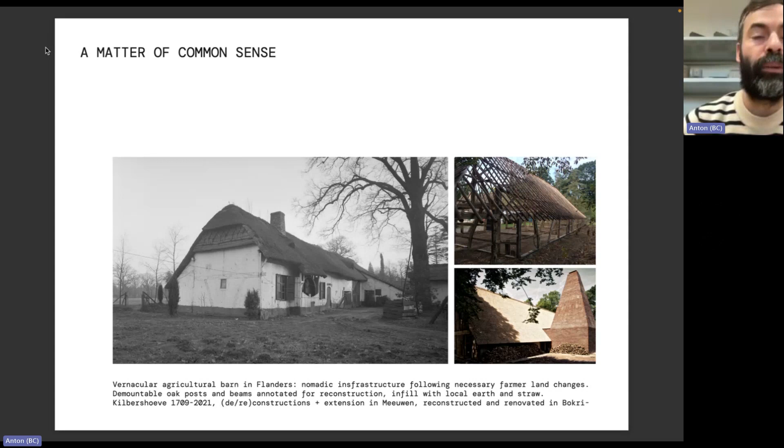And we saw this in Bokrijk, where the oak beams were actually numbered, so that people who would dismantle them later could really reuse them on the spot, reinstall them, and make a different structure or a similar structure. And for the renovation of this building, which was one of the first projects of BC Architects, we installed a rammed bar that you can see on the right side down. But in this way, you see that although the farming is obviously not the same anymore, this kind of building approach has a lot of merits and should be followed upon also in larger structures.

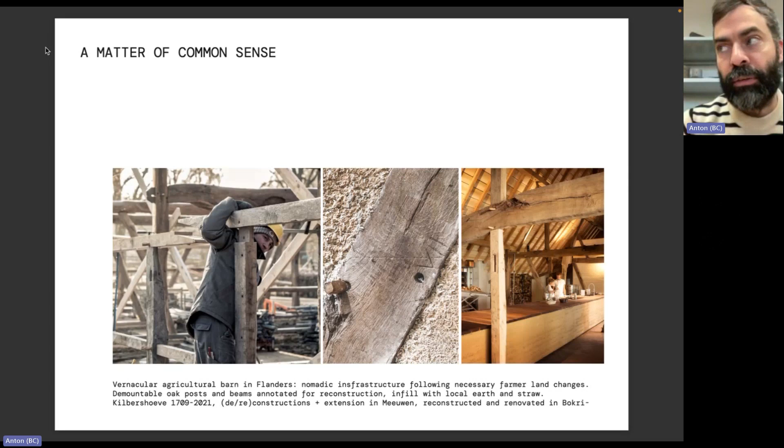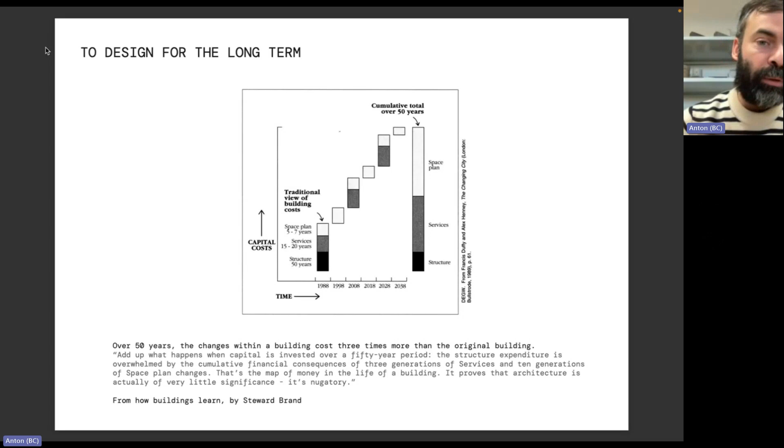As you know, architects try to design for the long term, but there are lots of costs that are underestimated or underappreciated. For example, the structure is considered very, very costly, but actually a lot of internal services and other expenditures in a building are also quite costly. So it also means that architecture is not that important as a lot of people think. It's also a matter of material use. It's also a matter of pre-design and availability of materials, because we know that we are running out of materials quite fast.

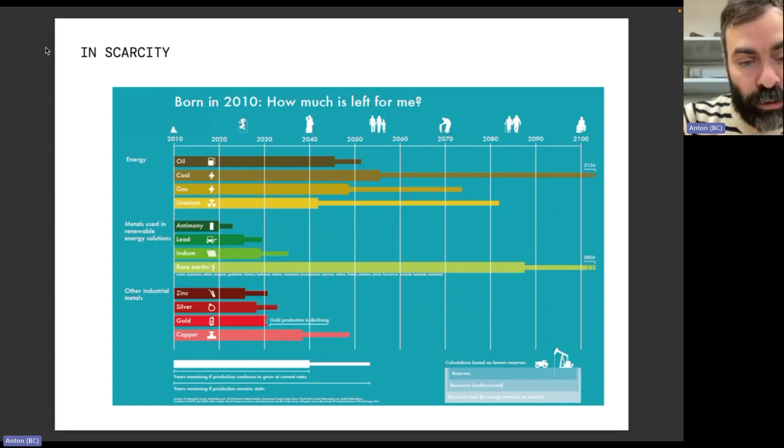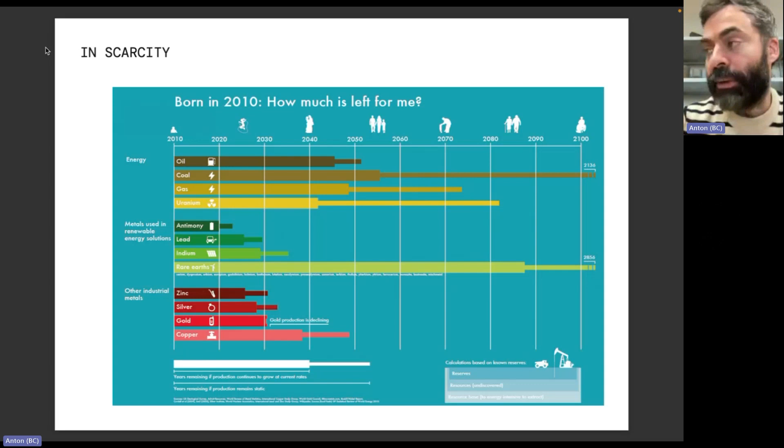I think in 2020, researchers found out that the amount of waste that we created on this planet actually surpassed the amount of biomass. So all the trees, all the plants, all the creatures in the world were actually surpassed by the amount of waste in the world. And one of the top quantities of waste is concrete, obviously, but also baked bricks and asphalt.

So we know that even if we work with a circular economy, it still has limits. And if we would all build very, very big houses on a circular base, we would still be ruining the planet. It means that even if we think from a circular perspective, we also should keep in mind the kind of sufficiency needs, and aside from sufficiency, also the complete reuse of the materials, because recyclability is not the only thing that matters.

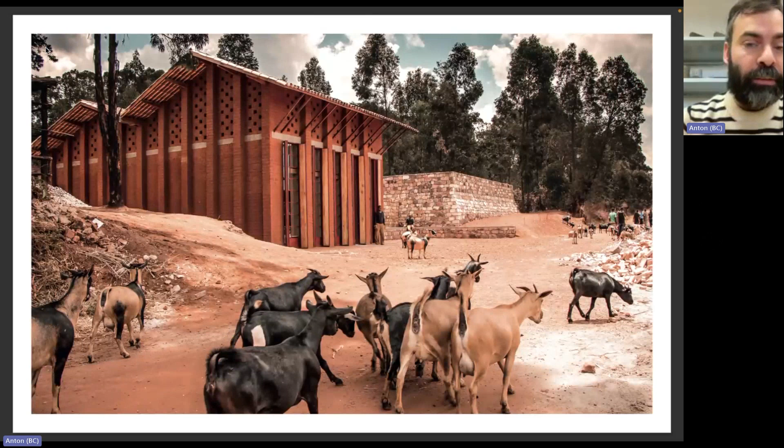This is a bit why we try to prototype a lot in our practice. We see that prototyping can help titillate the minds, can help stimulate the imagination. And our imagination was really triggered in a very, very revealing and a very enlightening way almost 10 years ago when we did this first project in Burundi.

And it's actually in a very small town called Muyinga. And there we discovered that it is perfectly possible to build with excavated earth. As architects that had just finished architecture school, we came there and we thought it's going to be impossible to build here because there are no classic building material shops. There are no possibilities to produce them ourselves because there are lots of hindrances and obstacles.

And it's actually a contractor who explained to us that it's perfectly possible to build with excavated earth and with lots of other local materials, bio-based, for example, that could be valorized on the spot. For us, it was a big revelation because, as architects, we were trained to work with steel, with concrete, with baked bricks.

But as we saw and learned on the spot, it's perfectly possible to use this kind of excavated earth. As you may know, in Africa, there's lots of laterite. It's a very reddish earth that has very good characteristics for earth building. It's quite strong. It doesn't have to be mixed that much with other earth streams. But it's actually there that we learned how to really work with and valorize local earth.

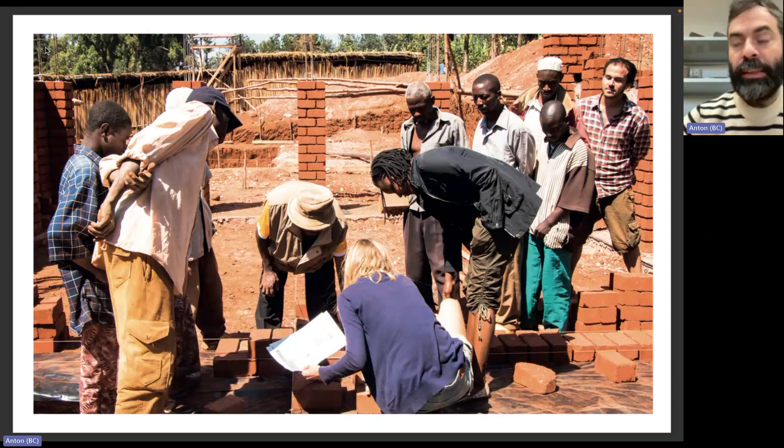And we actually saw that it's a very circular solution. But for people who build there, it's also the most standard and the most accessible solution. For them, it is the solution and it's a sufficiency aspect. Here in Belgium, we still have to learn a lot in that sense of using what is available in a short loop instead of seeing the whole world as a supermarket where we can buy materials from all over the world.

And this is also what we did in Arles as a team, BC Architects, BC Materials, the London bureau Assemble and Atelier Luma. Arles is a not so big town in the south of France, where the foundation Atelier Luma has bought a number of derelict buildings that used to be old train stations.

And our mission there was to really start seeing what is available around in a perimeter of about 100 kilometers, to see what we can use, what we can source in a very short loop to make materials, to renovate a number of these train stations and see what could be done with the materials that are available in the land, in the quarries, in the earth streams that are available.

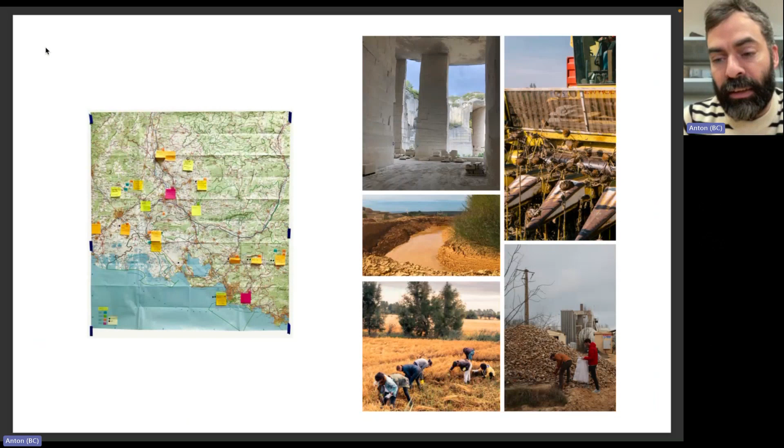Here you can see some pictures of a quarry at Sarrazin, also some excavated earth from different sites. And for example, rice husk, that is one of the most common plants being cultivated in Arles, and that can be used for insulation, or straw, for example.

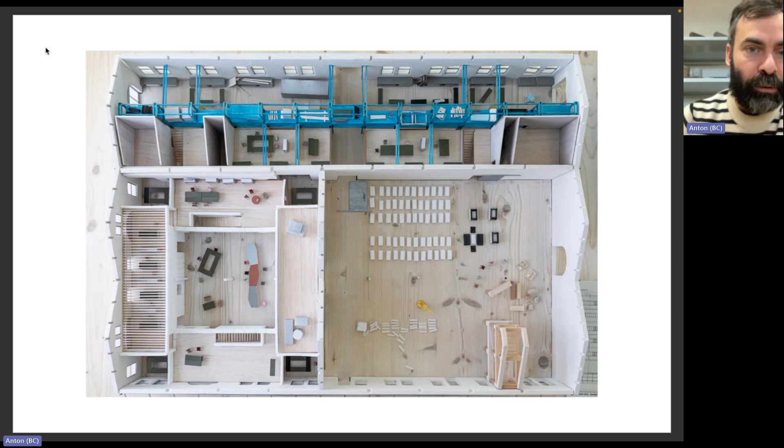It is a quite interesting site because it has both productive aspects and a kind of showroom aspect, and at the same time, on the first floor, a lab. And for this site, which is completely bio-local and circularly made, we made, for example, rice straw insulation panels that are acoustically much better.

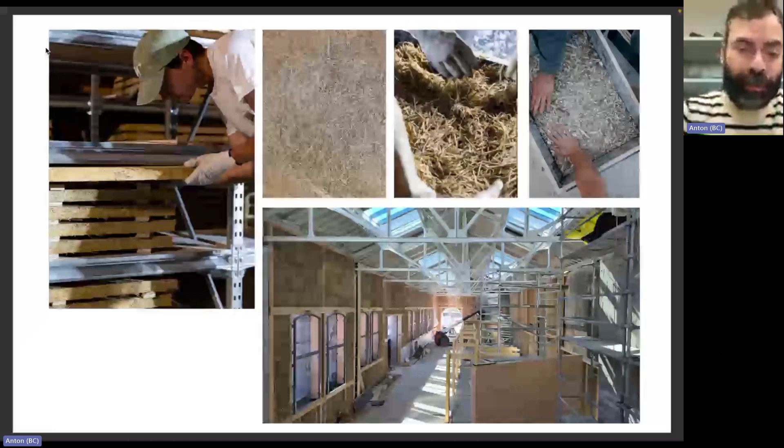They are situated at the ateliers. We saw that it was possible to kind of bind them and really compress them together, and they are situated at the left side. We also made typically rammed earth. You can see the picture on the right. A rammed earth that is based on typical elements of quarry waste, earth excavation, and gravel from the site.

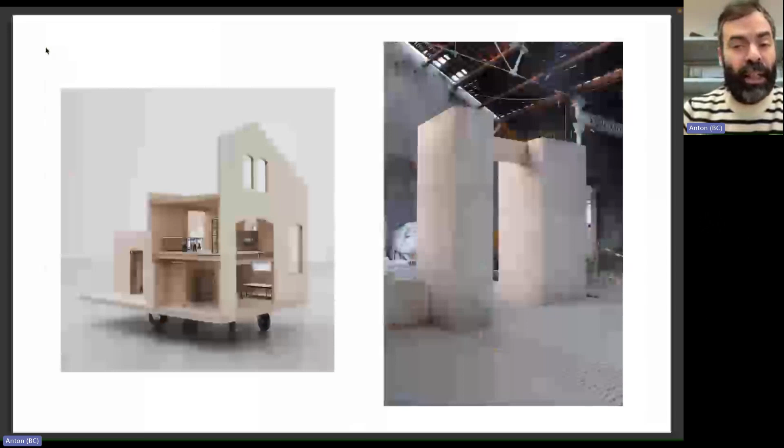You can see here the different elements that you can bring together that are practically CO2 neutral because they don't have to be baked, they don't have to be burnt to be used. And when you blend these elements and ram them together, you can make very decent structures. We obviously had to test them and see how much strength they could bear, how much load they could bear. And so we made a very, very specific rammed earth based on sources from this site to be able to implement it in the renovation of the train station.

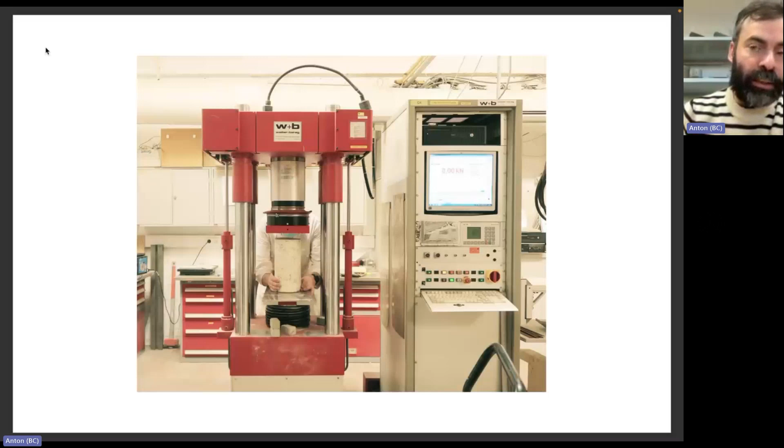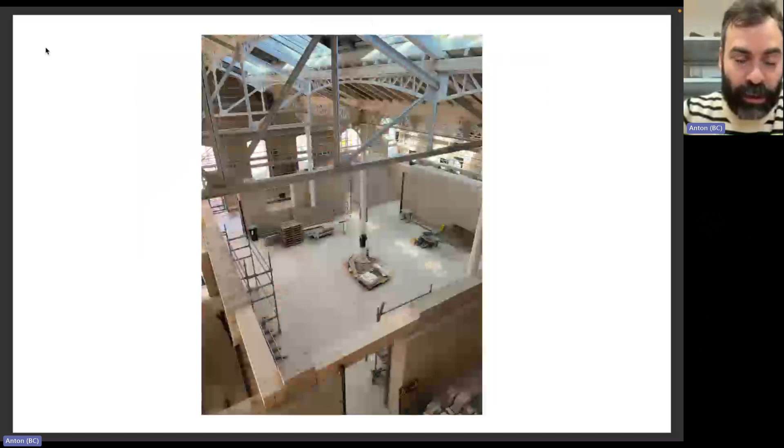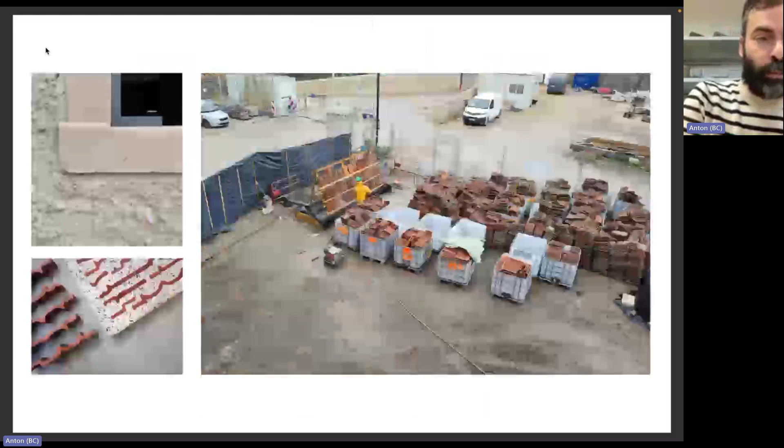Here you see some of the larger rammed earth structures. We worked with some of the best contractors in the world who do rammed earth, and we were really in awe of the excellent execution of all that they did. Here's some of the tiles that were left over from the roof. There we made a cocciopesto, so like a finish for the outside, and a terrazzo floor with it.

And last but not least, we also made a plaster made on algae. As you know, algae grow with CO2 as a kind of food for them. There's lots of algae in the Camargue, which is the natural park next to Arles, and we blended some of these algae with different plasters to obtain different colors, because most earth colors for plasters are usually gray, brown, or reddish.

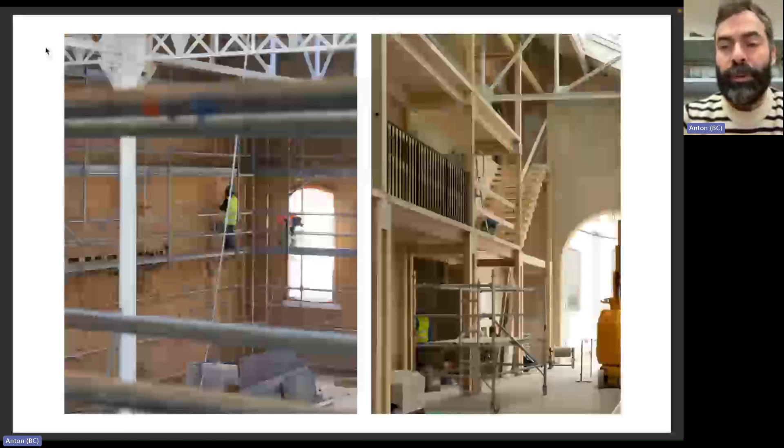Now with these kind of algae, you can also go towards green and blue, and it's just an example of how far you can go using bio-based and earth-based materials in a perfectly CO2 neutral approach with making a healthy application. Here you can see some of the clay plasters that are mixed with poppies for an acoustic finish.

And we also want to show you a bit the scheme, because this is a presentation about the short loop. It still involves lots of work and lots of people and lots of good contacts between contractors, suppliers, executors, so like contractors and architects. So it is quite a puzzle to make, but it's quite an interesting puzzle to make, because we see that the short loop brings a lot of extra value to the building chain.

And we can see that even contractors that were asked to come to Arles to apply certain materials have even stayed there, as a growing market that they saw for plasters, for blocks. And so we can see that the combination of using local materials and bringing in external help can be a very valuable one. We also saw that by using local materials and hiring local machines, you can really reduce the impact of the constant transport, which is reduced in a structural way, as Arles is almost 800 kilometers from Brussels.

Aside from this production of materials, we also did a lot of workshops with students from different corners of the globe in, for example, rammed earth, bio-based plasters, even straw husk. We really think that it's very important that people can learn how to apply these materials, as there is a big need. I don't think I have to explain that to people associated with natureplus, that there's a very large need for people to learn how to make and produce and apply these kind of new materials that are as old as the street, but that are still new for a lot of architecture students and even architecture groups.

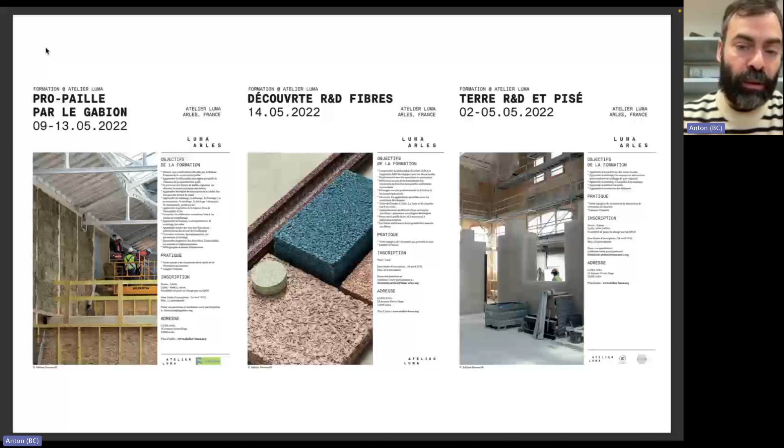And so this is why we really delved in quite deep to teach lots of people how to make earth mixes, how to make different bio-based installations, how it works, how the humidity regulation works, what are the assets. And then you get a finish that is similar to this. This was at the opening, picture by Joseph Halligan.

And for us, it's some of the best looks that our rammed earth can give, and the best structure that rammed earth can give. There's an ongoing opening there, so if you're in the neighborhood in Arles, I would recommend a visit. And we think that this is a very nice combination of bio-based reuse and clay plastering, clay-based, earth-based materials. So this is the final look.

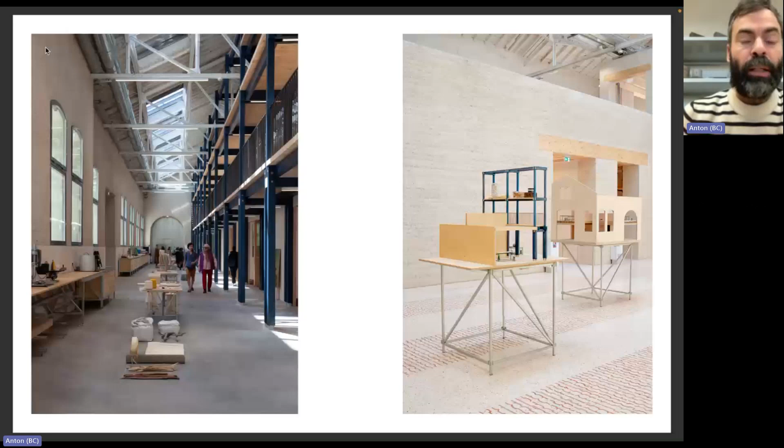Now let's delve a bit deeper in what BC Materials does. BC Materials worked a lot on Arles as the producing or co-producing entity that did both the research and development. But it started for us in 2019 when we observed, as architects and as people committed to the circular transition, that in Belgium alone there's about 37 million tons of excavated earth every year.

This is a huge amount, but I probably don't have to explain that practically at every construction site there's some excavation going on. This causes a lot of transport too. I think in Brussels it's about 100 trucks that are exiting Brussels every week to stock it at a temporary storage field usually, where the transport takes it up again towards, in the case of Brussels, Flanders and Wallonia, to be dumped in mines and quarries, but unfortunately in some cases also to the Netherlands and to France.

We have in Belgium 37 million tons, I think also because, as you know, the Belgians have a brick in their stomach. They want to build everywhere. We probably have the worst spatial planning in the world, but that also means that there are constantly construction sites going on, and there's lots of excavated earth that just doesn't find its place in the country.

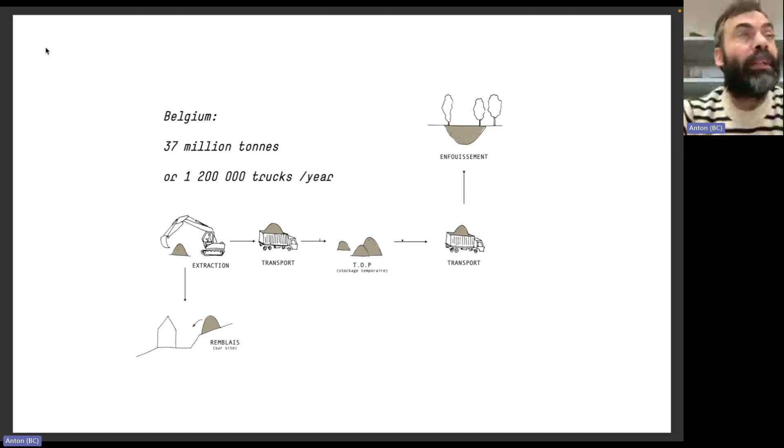And so we see that a lot of contractors who are working with excavated earth have more and more problems using or valorizing this earth and are stuck with it. And some of the neighboring countries are even asking money to cross the border with this earth. And I'm not even mentioning the costs to dump it in mines or quarries. So this is becoming a bit of an issue, what to do with the excavated earth.

And so our solution is quite straightforward. We actually intervene within the transport. So usually when the trucks are leaving towards the tip, we can offer them to bring the earth to us, for example, clay, silt, and sand, and we can produce on the spot.

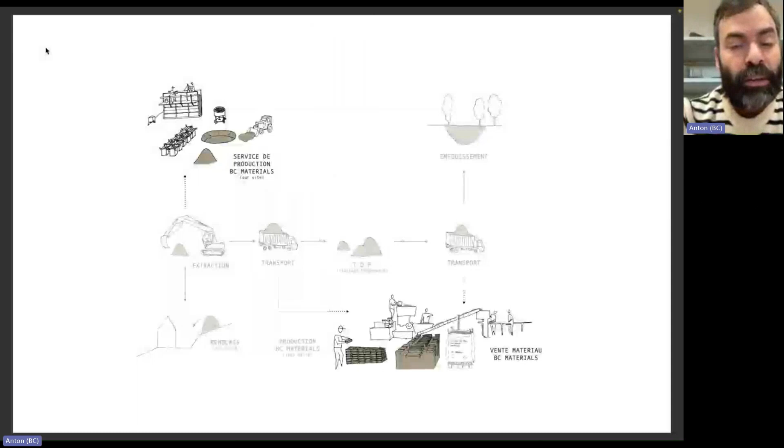We have a production hall of about 1,300 square meters in Brussels, where we produce earth blocks, clay plaster, rammed earth, and different earth-based materials in a standardized way, because the transporters and the excavators already know us now, and they know which kind of earth we need, and we buy it at a very limited price, because for them it's waste, and for us it's an ingredient.

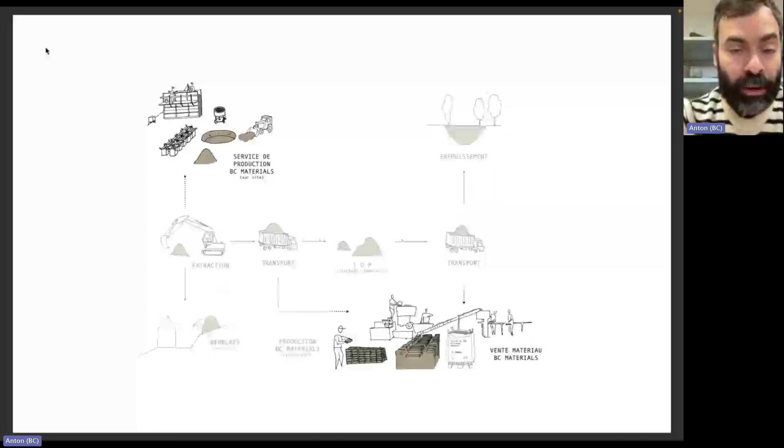Officially, juridically, you may notice, excavated earth is still considered as a waste. We have an exemption and an environmental permit from Brussels Environment to work with earth, because we follow all the standards and all the norms on polluted earth. Obviously, there is a lot of polluted earth in the world, not only in Belgium, especially if it's excavated close to an industrial site.

But we also see that there's lots of excavations going on constantly, and we think that about half of the excavated earth that is circulating in Belgium, but this is the case for a lot of countries, can really be reused for making earth-based building materials.

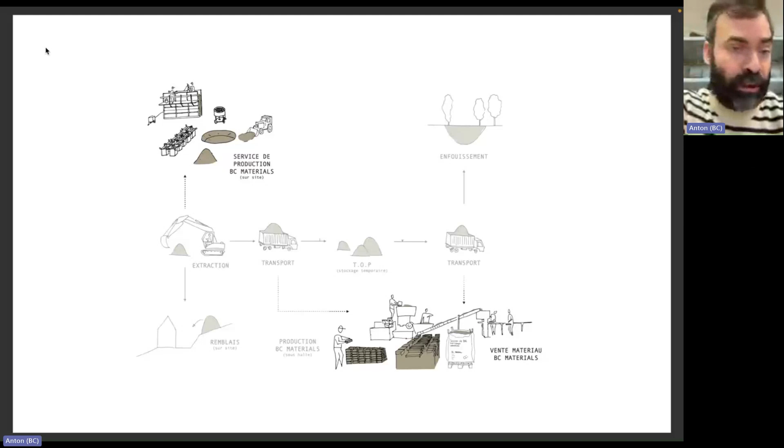We also have a way where we can work on the spot. We've done this before, and that is where the extraction happens, but we're directly producing materials on the spot. It is a bit more complicated because sometimes we have to prototype and test the earth again to see if it has the right characteristics.

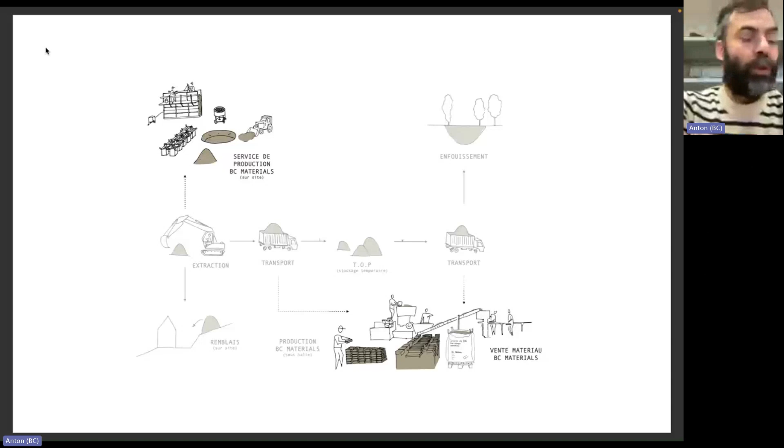And obviously, logistically, this is also more complex because a lot of construction sites usually don't have the place, especially in an urban context. It's very difficult to find enough square meters to stock, to produce, to mix earth, and to be able to really produce significantly with regards to cost. The local production scheme where you start producing immediately after extraction will always be more expensive than a more standardized mainstream production.

And so we see earth as the game changer, the most obvious circular building material, because it can be reused, used on the spot. It's in a constantly available stream that you can valorize, and at the same time it can be disposed of again without hurting anyone or anything or even nature itself.

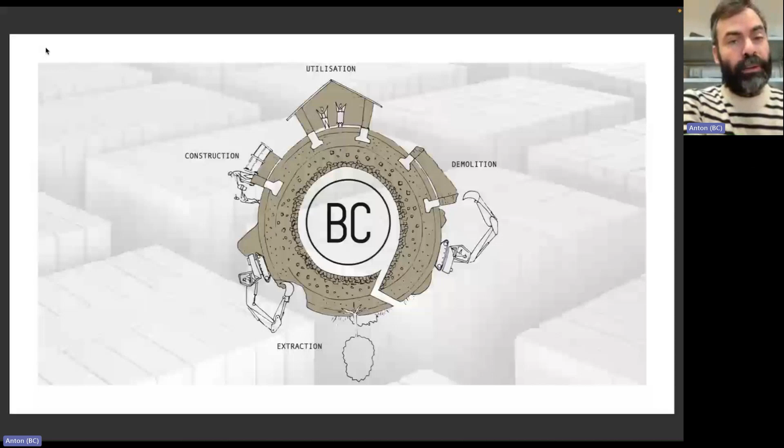And so our idea is that earth-based building materials are circular in both origin and destiny. In origin because they're based on waste, and in destiny because they can be constantly reused an infinite number of times without losing any of their good characteristics. You don't have to bake them, so they're CO2 neutral, and they are not resource depleting, because there is an infinite stream that could be tapped into, and they are not being chemically altered, so they can be reused as much as possible.

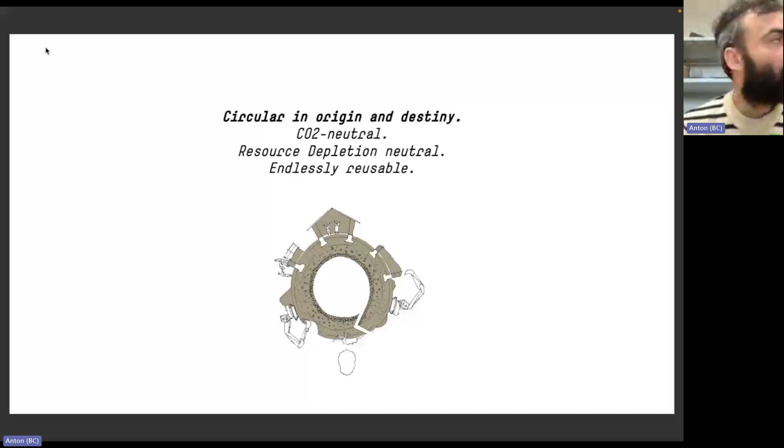Aside from that, we also have to mention, and we do this a lot, that they're CO2 neutral and that they're circular. For a lot of people, it's an externality that they will never feel. So we have to stress, and I think it's also one of the works of natureplus and Vibe, we have to stress the assets that it brings to people on the table directly.

And so in that sense, we also stress the regulation of indoor humidity. We also see that earth-based materials are now more and more used in archives and conservation of art pieces, because it keeps the humidity at a very regular and constant basis.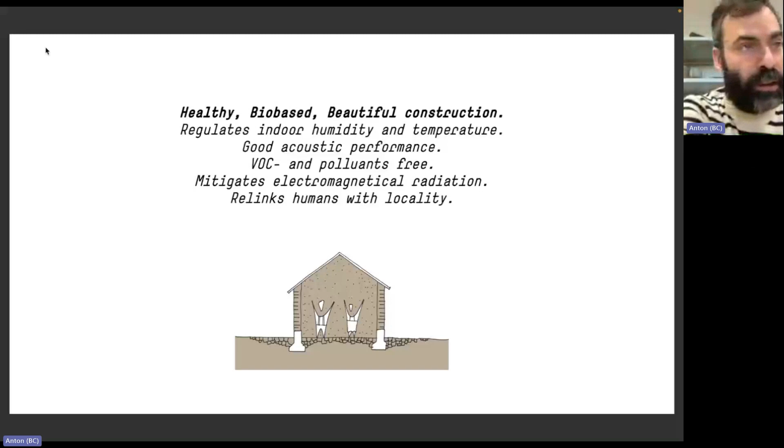We also see with the changing climate, for example, a small country like Belgium that is quite north and that used to have a lot of colder summers has now had 2 heat waves in this summer alone. You all know that 2023 is probably bound to be the warmest year ever measured, with the latest methodologies.

So we have to start preparing houses for heat waves, and earth-based materials are heat mitigating because of their thermal mass. And aside from that, they also offer good acoustic performance. So we really regularly pitch it also to offices and living rooms and spaces where some noise can happen.

We also think that it really relinks people with their locality. I think in this globalized era, people have felt that a lot of stuff is flowing a bit out of their grasp, and we think local earth-based materials are a way of connecting people again with their community and what is happening around them.

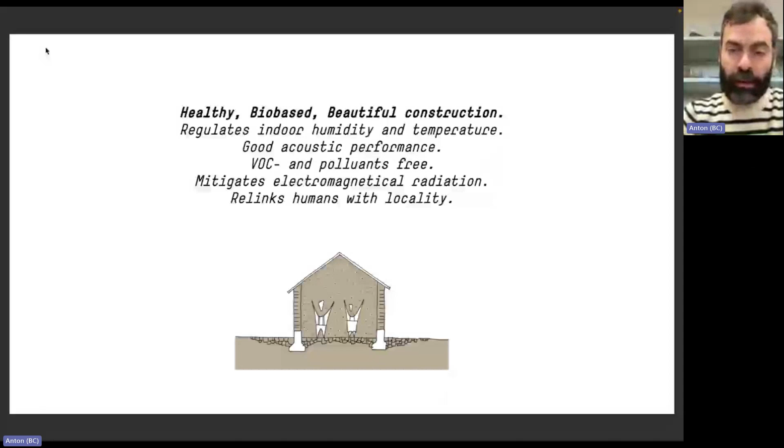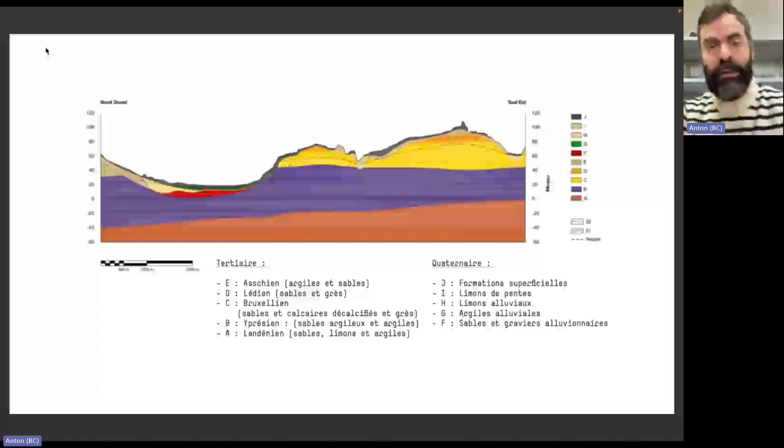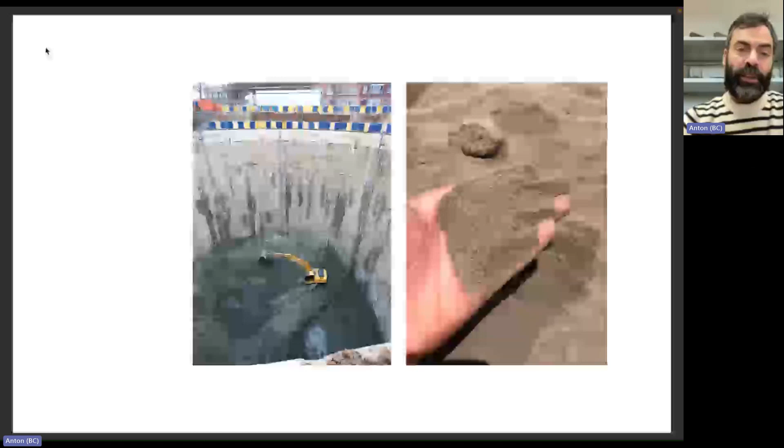So here you see some of the typical excavation sites. This one is in Ukkel, and the Brusselian sand that comes out of it. Here you see a bit deeper, a storm basin. This is actually with some more clay. And obviously the gravel is also available because there's lots of demolitions going on.

I think in Brussels we now see that there's regulation coming up that is stopping this demolition, which is a good thing. But the flow of gravel and of hard waste leftovers is not stopping, and I don't think it will stop very fast, actually.

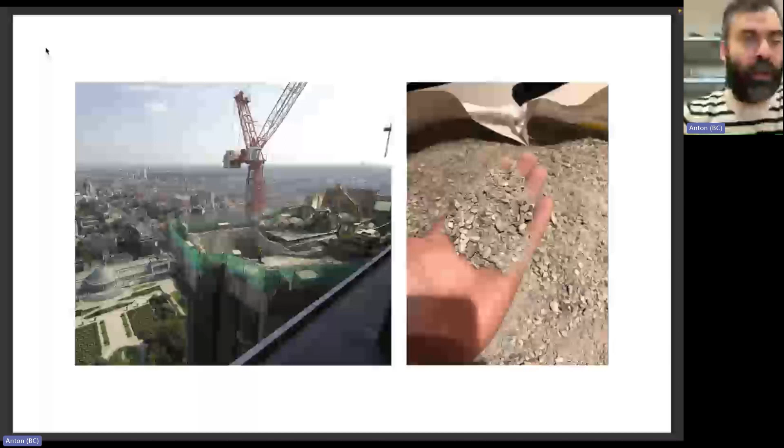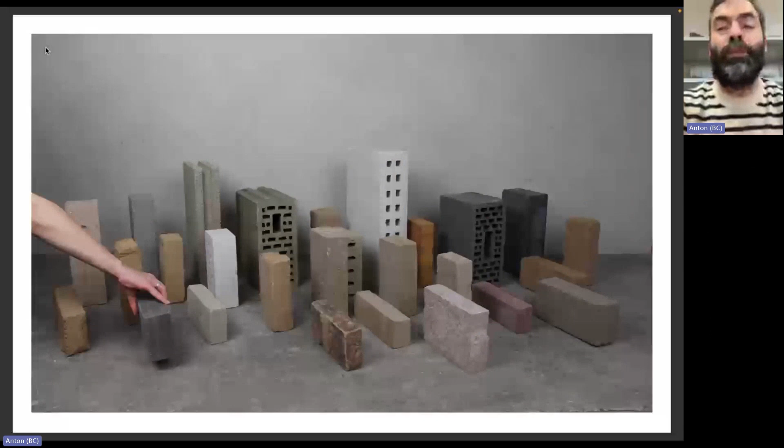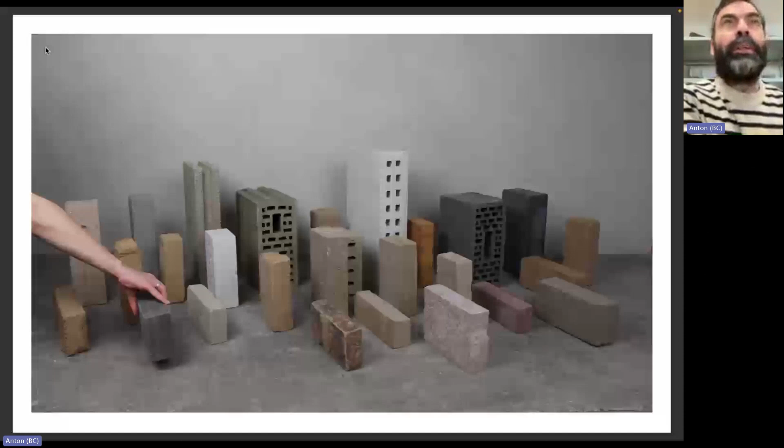We saw that there's lots of potential to change compressed earth blocks that are used inside as a substitute for the baked bricks that are in a lot of cases also used inside, because contractors usually just order, let me say, 20 pallets of baked bricks. Most of them are used for outside or the inner cavity leaf, but they're also used for the inside walls because they've been ordered together. But we could already reduce lots of CO2 just by masoning the inner walls with a number of these compressed earth blocks.

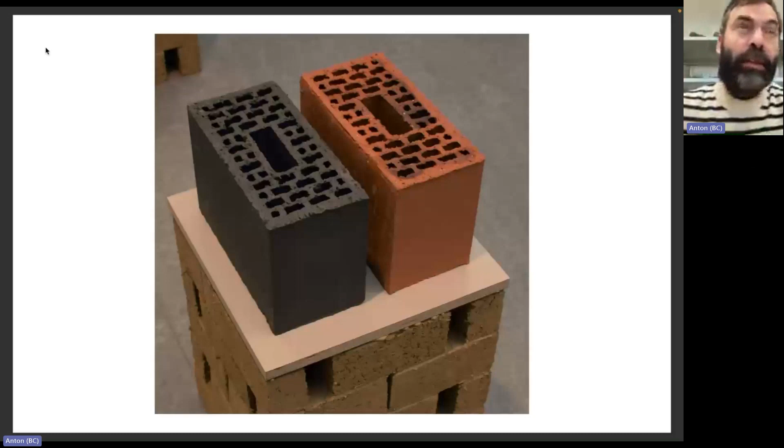This is a bit the research picture that we did because we wanted to show how much is possible with this approach. So on the right, you see the classic baked brick, but you can also make a leftover waste brick that you see on the left, and that could be a CO2 reducing capacity of up to 90%. So we tried this out, and here you see a shot of the production at Glass, where we can make 100,000 blocks a day by leasing and compensating for the infrastructure.

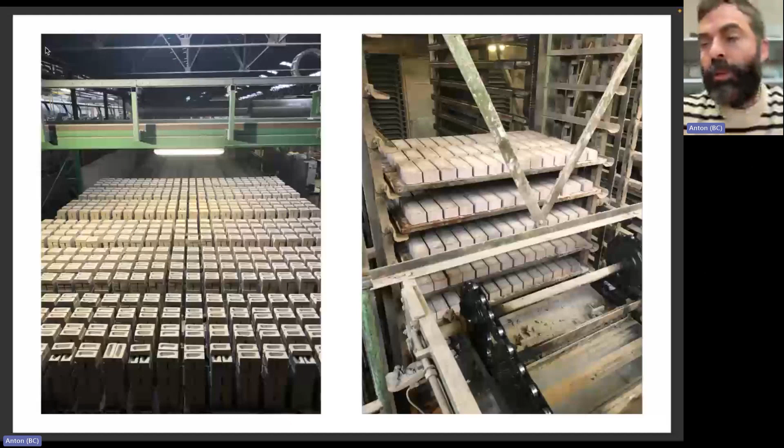And we see this is really a nice way to produce industrialized compressed earth blocks without losing any of the qualities and any of the ecological aspects of the product. Here you see a bit how we go into detail with Rodrigo from TerraBlock to see how we can make our formula, our block, work within an industrial infrastructure that normally works with concrete blocks. And so we tap into the industrial capacity that is present in Belgium, but that is actually present in the whole of Western Europe, to make products that are mostly decarbonized and that could be really valorized quite fast.

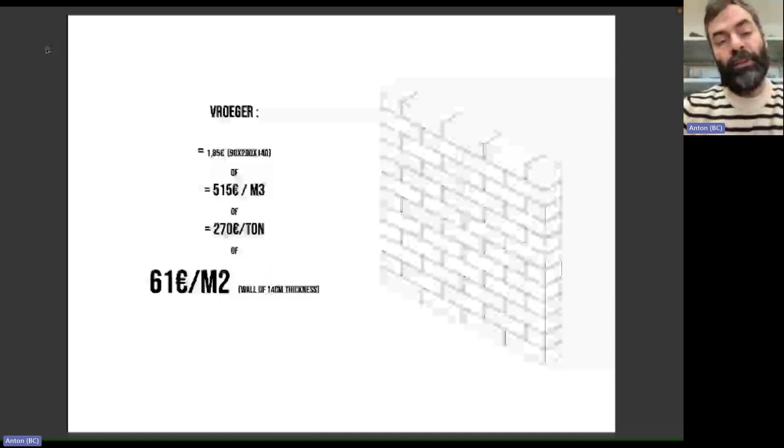And so what we could offer to people who are interested in earth-based materials is that where we used to have to say that our square meter for a 14 centimeter thick wall cost about 61 euros per square meter, which is quite expensive in comparison to the current market rate, we could go towards 43 euros per square meter, and so have a cut of about 30%, which is quite significant, as we also see that a lot of big brick producers had to turn up their prices especially during the midst of the Ukraine war, where the gas price went up and the margins of lots of big producers were just gone.

They complained a lot about it because we see there how fragile our economic system is when people who are dependent on a gas contract that is not flexible or that is fixed at the market rate actually lose their complete margin on baking bricks when the gas price goes through the roof. And as the gas producers are having a lot of leverage in this game, they could turn up the price whenever they wanted and sell to whomever they wanted.

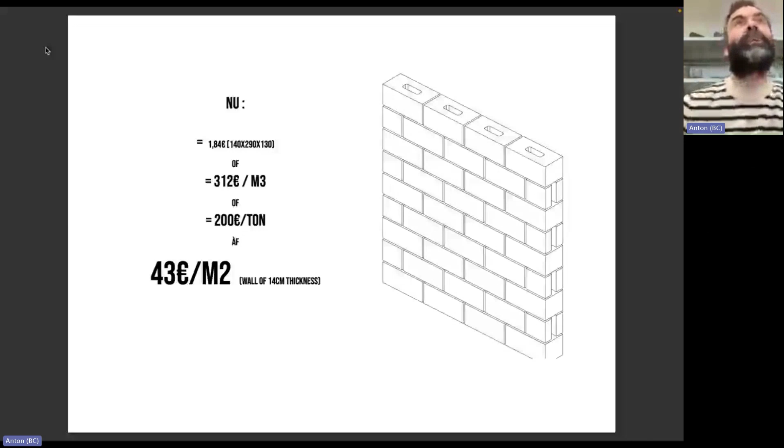And some of these big producers had to temporarily close their production so they could give some oxygen to the team, because it was just not worth producing these quantities that they normally produced in a classic way. And so you can kind of see the shift coming up, where you can have a decarbonized industry where we lease the possibility of these materials, and where we lease the scaling up of these materials without having to go through all the fossil intensive problems that are already happening.

With BC, we continue to innovate because we think that aside from clay plasters, clay paints, compressed earth blocks, and rammed earth, there are still some other possibilities. I think in English it's called a screed. In Belgium it's called a chape. Even Flemish people call it a chape. It's like a subfloor that is usually poured with cement and that is very CO2 intensive.

We have now made a screed based on excavated earth with a bioadditive that is as strong and as performant as a classic screed. It just dries a bit longer than a classic screed, but that can be planned within the building scheme. And I think it's a very interesting way of looking at something that is very classic, that is much used, overused actually, and that can be replaced by something that is 100% circular and practically CO2-neutral.

In Brussels alone, about 30,000 cubic meters of screed is poured every year. We think in Belgium it's even much bigger because it's a very common way of working. And it actually doesn't have to be as strong as it has to be with cement, because it's usually insulated from water and all kinds of infiltration. It can be used as a subfloor and finished off with a wooden floor or a tiled floor or whatever people can imagine, a cork floor, for example.

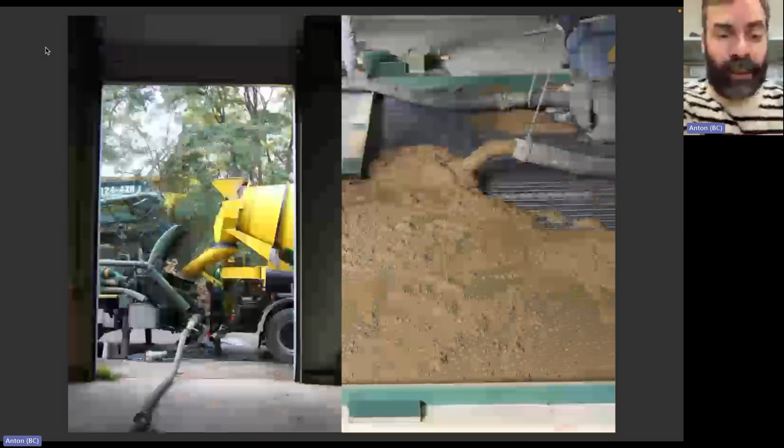In this way, we can kind of see that wood structures are the locomotive of bio-based building, and earth is a very handy complementary material that can be used for interior finishes, for walls, also for load-bearing walls, and for example, with screed that can finish it off and make the whole structure work better. This is a bit the way that it works now. The screed is actually mixed in a concrete mill. As you can see, it's quite a funny combination that something that usually makes concrete is now pouring earth.

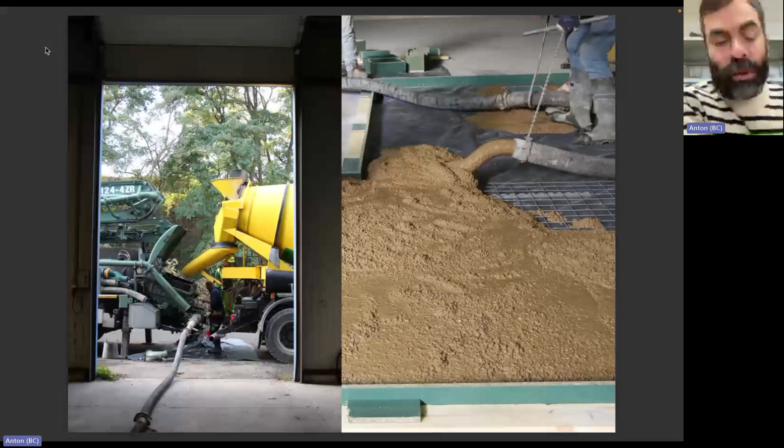We've done a number of tests so far. It's gone through a long development phase. It started with just the idea: what if we make a screed based on excavated earth? And in this case, we started to test it first in a lab, then in a climatic chamber, and then on some test sites where we did it at a large size of square meters. And now in November, we've done the first 2 construction sites with this excavated earth and poured the chape on an existing foundation, and so far the results have been very good.

We're talking with the 2 partners of the scheme. There's both a contractor and a material consultant involved. The contractor is EMB, who has been pouring screeds for decades and who has quite a lot of experience.

And for us, it's handy that we have direct feedback from the site, because a contractor is always necessary to apply any kind of materials. This is sometimes a bit underestimated when you're launching a new product, that there's always somebody executing, and however nice a material or a theory sounds on paper, it always has to be applied, and this is a fresh material that has to be poured quite fast. It has to be done in an efficient way.

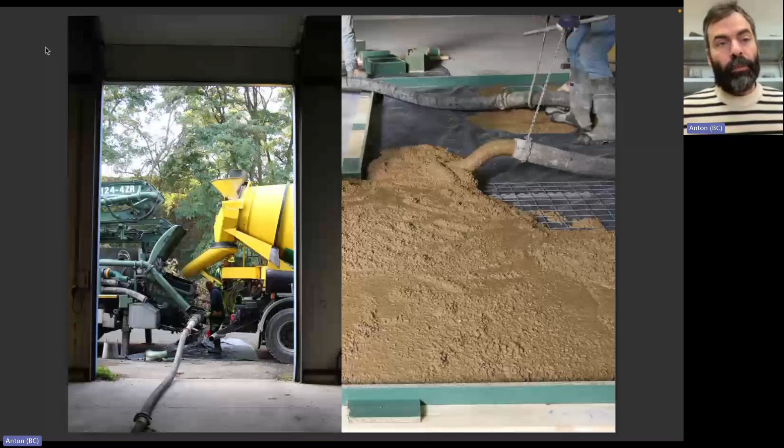As I mentioned, this is all what we call leem. We see it as a mix of earth plasters and paints that are typically finishes for walls, earth block masonry that is both load-bearing and non-load-bearing and can be used to build walls. And then rammed earth, that is a very specific material. You saw it in the Luma project where we use it as a structural wall. But this is quite rare because rammed earth is quite expensive in application.

The other materials like plasters and blocks are quite straightforward, are not difficult to produce, and are not difficult to apply. Whereas rammed earth is quite straightforward in the production, being based on waste, but the application is quite intensive and has to be well coordinated, and is therefore quite expensive. But as I mentioned, we still think that there are lots of possibilities.

For example, with the screed, but we also see possibilities of blending bio-based materials with earth-based materials, and really leveraging this approach of a short loop, a circular design, and practically zero carbon impact.